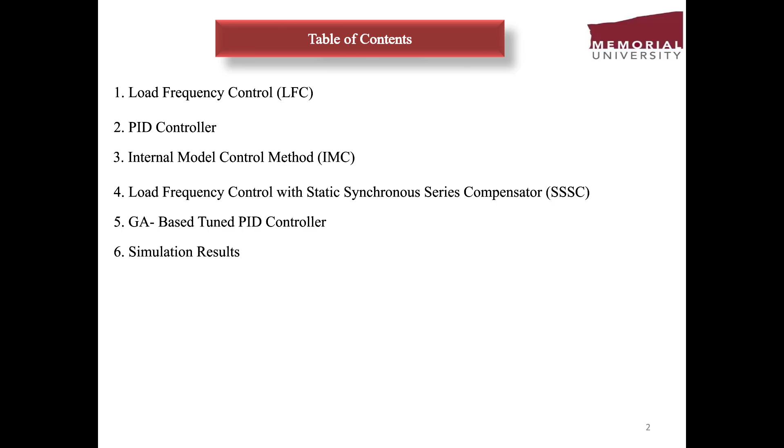This slide is about automatic generation control or AGC. AGC is a control system that automatically adjusts the power output of multiple generators to keep the system balanced. Its main goals are: first, to keep the system frequency at the correct level. Second, to control the power exchange between different areas. Third, to make sure the power is generated efficiently and economically. AGC helps make the power system more stable, reliable, and automatic.

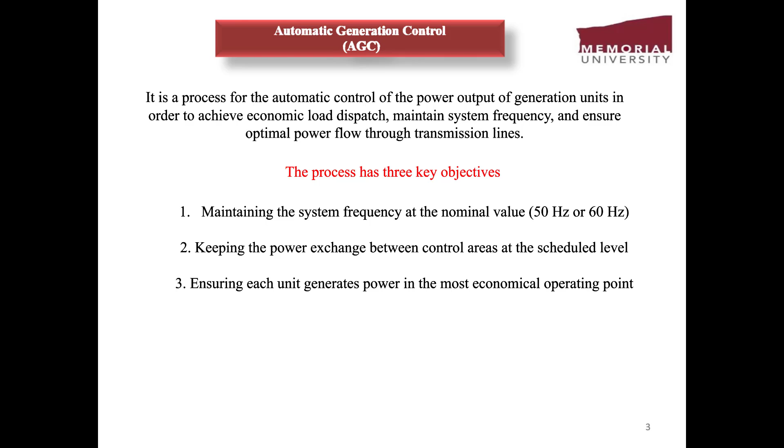We have two important control issues in power systems. First, active power. Control of active power is closely related to frequency control, and frequency is inversely related to continuous load variation. Second, reactive power is related to voltage control.

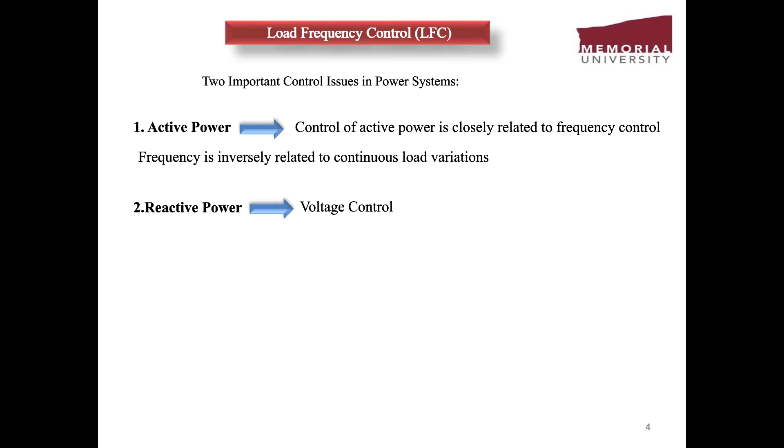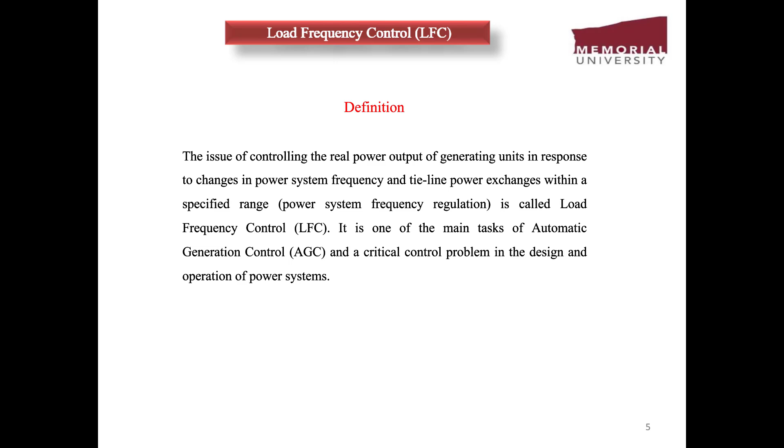Load frequency control controls the power output of turbines. It keeps frequency and power flow stable. LFC is an important part of automatic generation control, AGC. LFC helps keep the system frequency stable. Its main goals are: first, remove long-term frequency error. Second, reduce unwanted power flow between different areas. Third, follow changes in the load quickly and accurately. Finally, keep frequency response smooth, with low overshoot and fast settling.

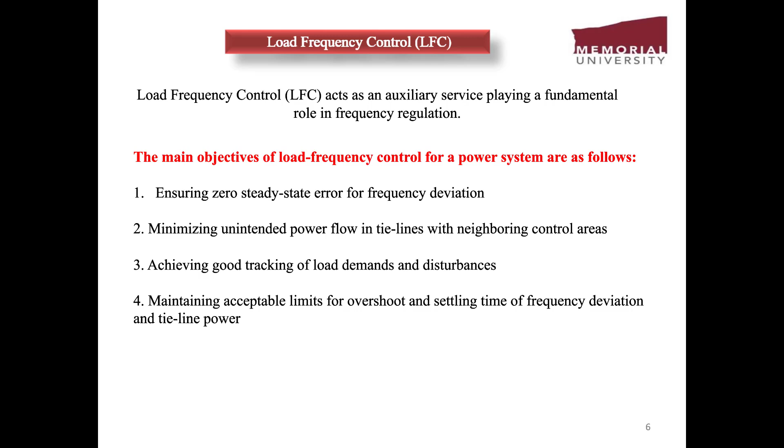When the power of generation is less than the power of load, the frequency drops rapidly. Second, in the absence of appropriate system response, it causes the frequency to deviate from the operational range of the equipment. Finally, power system collapse.

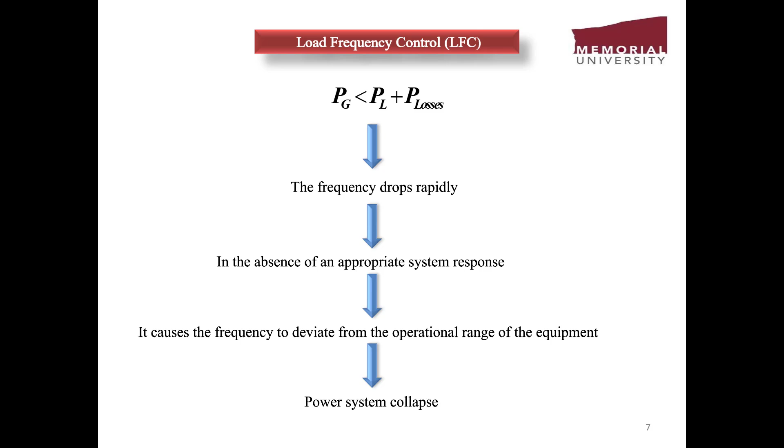In this slide, you can see the main control loops of the generators. The upper loop is the loop of voltage control, and the bottom loop is the main loop for load frequency control.

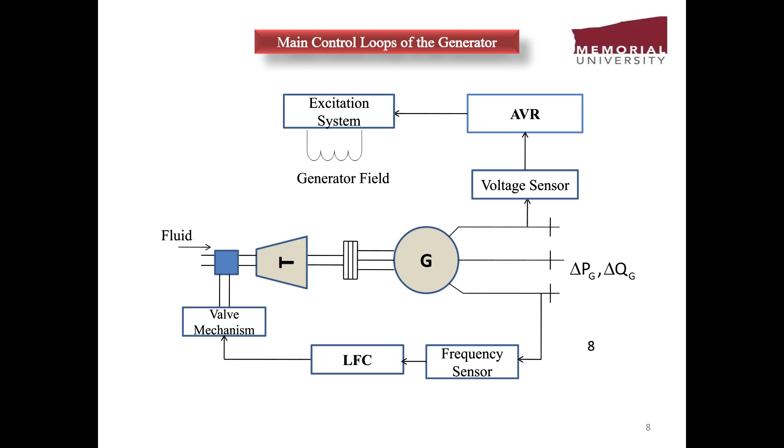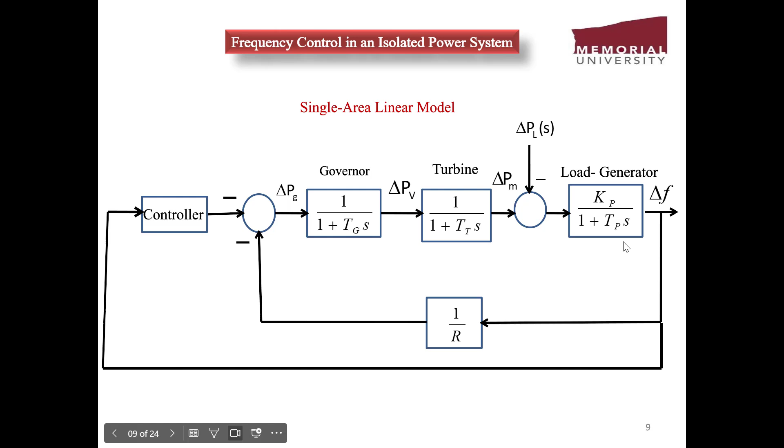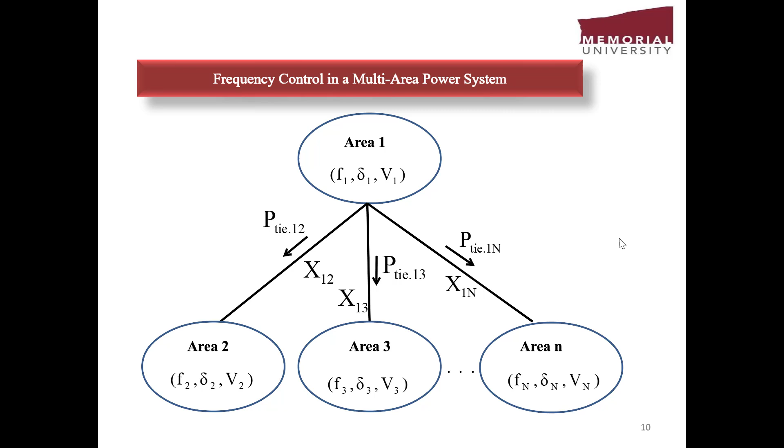In this slide, we show how frequency control works in interconnected power systems. In isolated systems, frequency control only focuses on bringing frequency back to normal. But in interconnected systems, we must also control tie-line power between areas. So each control area must manage both its local frequency and power exchange with others.

PID controllers. One, single input, single output process, like the Ziegler-Nichols method, a classic tuning method based on system ultimate gain and period, or the gain phase margin method, which ensures stability and desired margins by analyzing the open loop frequency response. Second, optimization based tuning. Assume a PID structure and tune parameters using optimization techniques, like minimizing error or a performance index.

Third, model based design reduction. Design an advanced controller like LQR or H infinity and approximate it with an equivalent PID controller for simplicity. These ways show all the approaches for PID controllers.

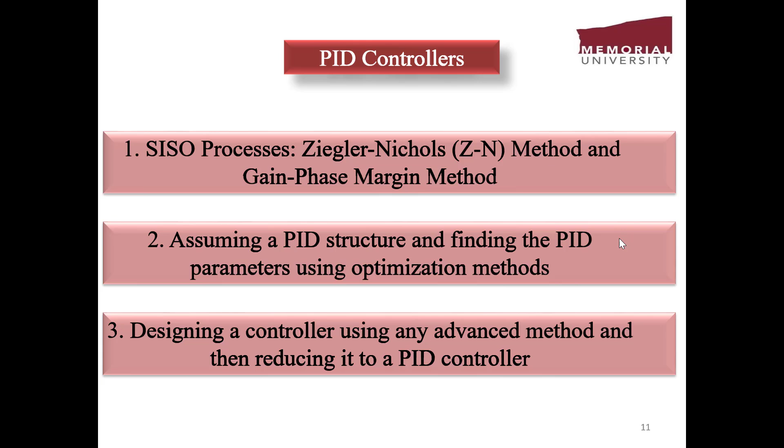In this slide, we explain internal model control or IMC. IMC is one of the key techniques for controller design. It works based on having an accurate model of the system, allowing the controller to provide a stable and precise response to both input changes and disturbance.

We explain the decomposition of the system model into parts. This system model, P-tilde, equals Pm times Pa. Pm, the minimum phase invertible part of the system, representing the stable and controllable dynamics, and Pa, the non-minimum phase part with unit magnitude capturing non-invertible elements such as unstable zeros or time delays.

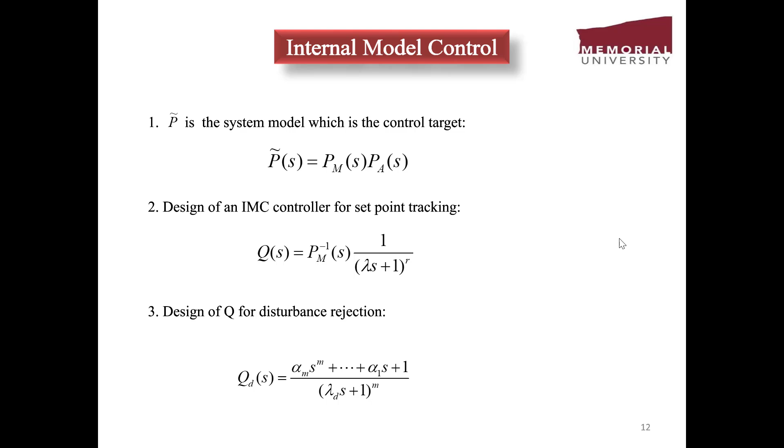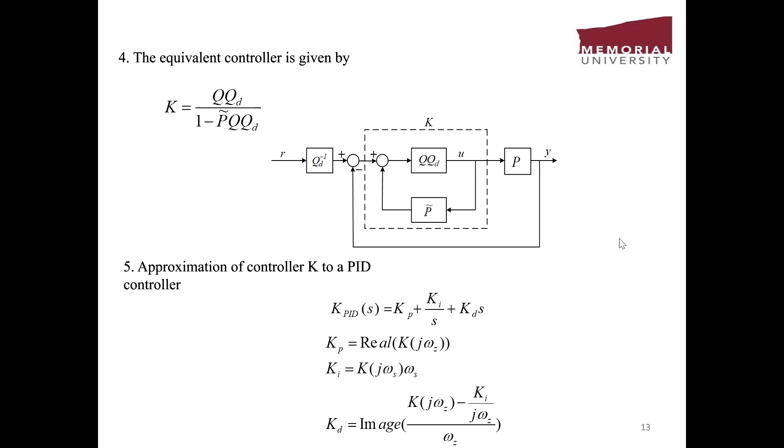Finally, the equivalent controller is given by K. As a result, the controller approximates to a PID controller with KP, KI, and KD. Sorry, excuse me.

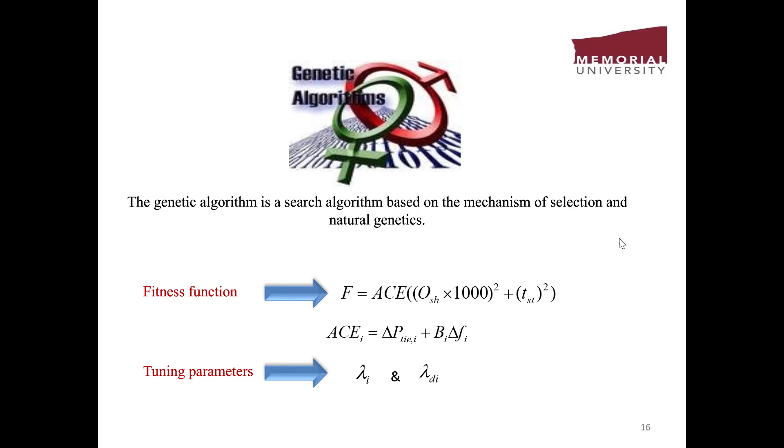In this slide, we can explain the fitness function. My fitness function is to minimize overshoot or undershoot and settling time. Our goal is to tune the parameters lambda and lambda d in the internal model control structure using a genetic algorithm in order to minimize the fitness function. As I mentioned before, the function minimizes overshoot and undershoot plus settling time.

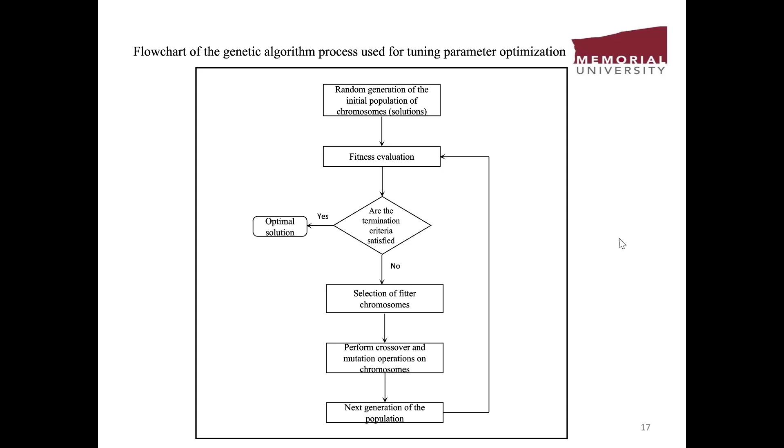This slide shows the step-by-step process of how the genetic algorithm is used to optimize controller parameters. First, we initialize a population of possible solutions. Then we evaluate each solution using a fitness function which measures how well it performs. Third, the best solutions are selected and through crossover and mutation, new solutions are generated. Finally, this process repeats for several generations until we reach the best optimized parameters.

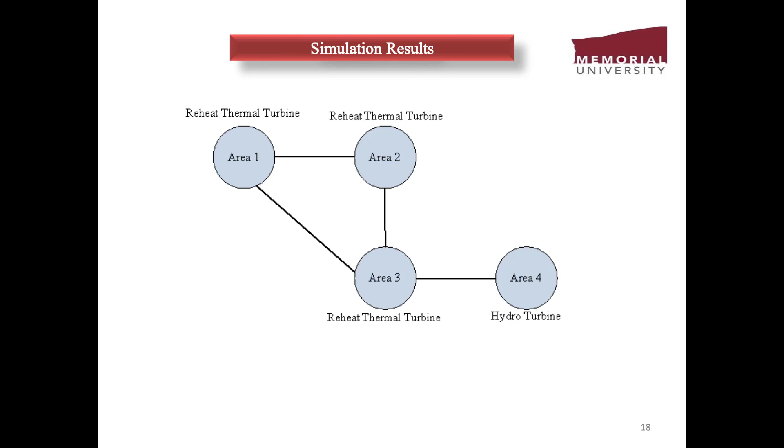In this slide, we show the schematic of a power system used for simulation. It includes four areas. Areas 1, 2, and 3 have similar thermal units with reheat turbines. Area 4 is a hydropower plant. The performance of the proposed PID controller designed using a genetic algorithm or GA within the internal model control framework is evaluated under three different scenarios to assess its effectiveness and robustness.

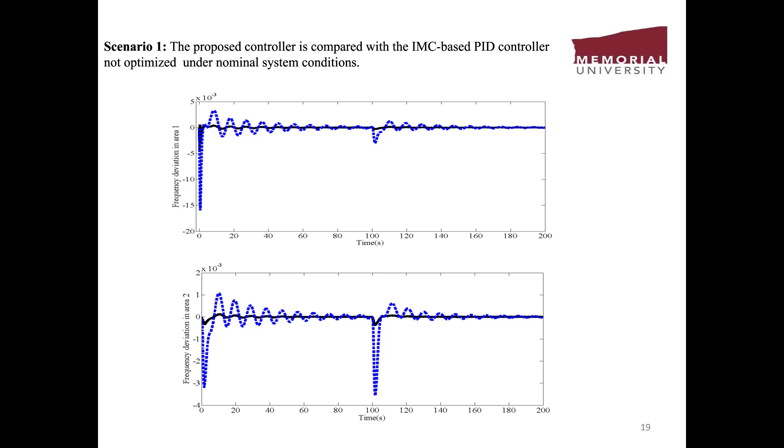In scenario 1, the proposed controller is compared with the IMC-based PID controller not optimized under nominal system conditions, where the solid line represents the response with the proposed optimized PID controller and the dotted line corresponds to the PID controller not optimized. Simulation results demonstrate that the proposed controller achieves better performance across all metrics. In particular, it significantly reduced the settling time and overshoot while minimizing steady-state error and improving overall system robustness. You can see the frequency deviation in area 1, area 2, area 3, and area 4.

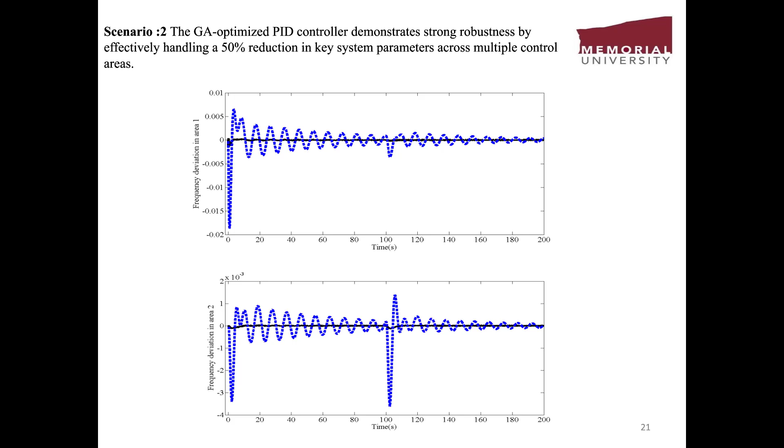In scenario 2, the PID controllers tuned using the genetic algorithm are tested under a 50% reduction of the key system parameters in the first three control areas. This parameter variation aims to demonstrate the robustness of the proposed controller against power system uncertainties. Frequency deviation responses across all four areas are shown in figures where the solid line represents the response with the proposed optimized PID controller, and the dotted line corresponds to the PID controller not optimized under nominal system conditions. Simulation results confirm that the proposed controller maintains strong robustness against the system parameter changes. Also, you can see the frequency deviation in area 1, area 2, area 3 and area 4.

In scenario 3, implementation of the proposed controller in presence of SSSC, the proposed PID controller is implemented in the system along with the static synchronous series compensator or SSSC. The objective is to evaluate the controller's capability to maintain frequency stability under dynamic conditions and external disturbance. The SSSC plays a crucial role in enhancing the system's dynamic response. By injecting a series voltage, it improves the frequency profile and effectively reduces oscillations.

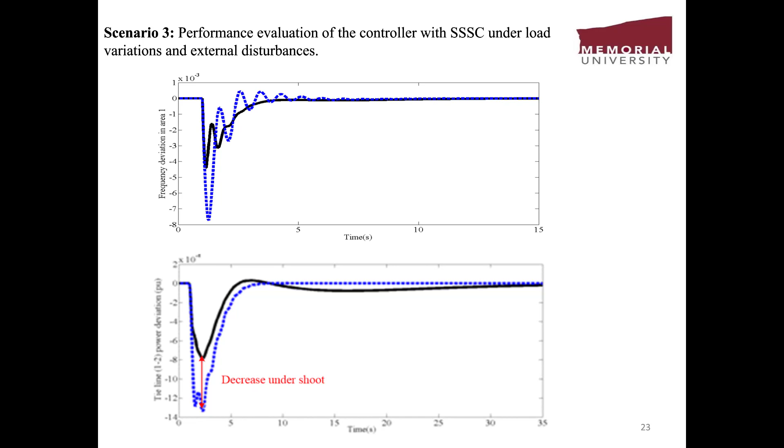Simulation results indicate that the proposed PID controller, when used in conjunction with the SSSC, has a strong performance in damping frequency deviation and maintaining system frequency within acceptable limits. Also, you can see decreased undershoot.

This study introduces a high-performance internal model control-based PID controller optimized using a genetic algorithm to significantly improve frequency stability in power systems. The controller demonstrates exceptional dynamic response with simulations confirming faster settling times, minimal overshoot, and near zero steady state error compared to conventional methods.